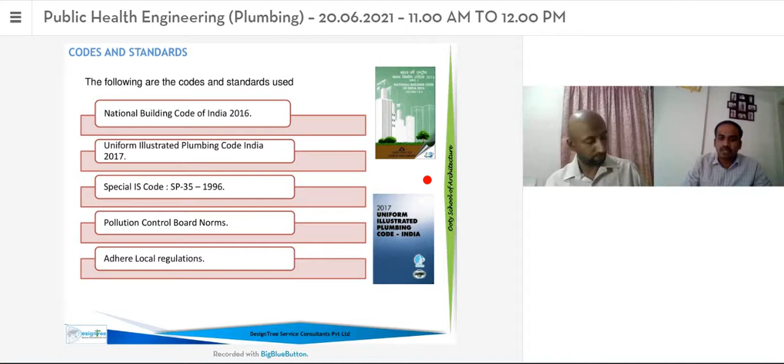We have other codes also: the Uniform Illustrated Plumbing Code of India, released in 2017, and IS codes like SP35. There are also certain guidelines which pollution control boards give, and also MOEF regulations and water supply authority regulations. There are many of these which we have to give priority to also.

Coming to the water supply system, you all know how water supply is distributed in our houses. We will be having an underground sump, and then we will be pumping that water to an overhead tank. From there we will be connecting to all the required areas like the toilets and the kitchens.

You might be thinking, why as an architect do we have to see all these things, why this presentation for us? The answer is, when you come into the profession and start detailing things out, your seniors will not have that much time to teach you everything. We have seen in the past that many architects, even with 5 or 6 years experience, fail to understand why this is required for buildings.

That is where even our company has taken an initiative, almost from the last 8 years, guiding architectural students on the basics - what are the basics, and while you are designing your concepts, what things you have to consider. That is where today's presentation comes in.

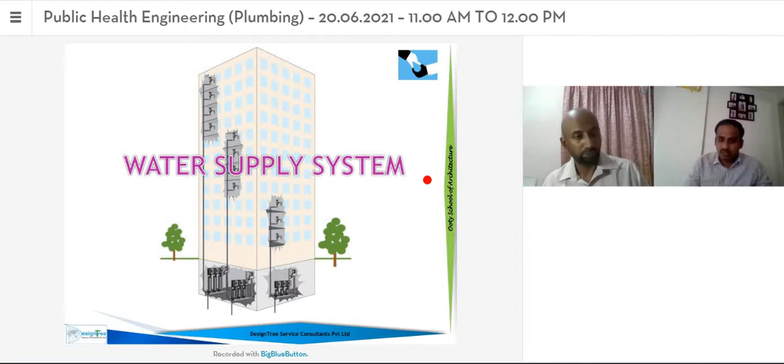Coming to water supply, what are the sources of water available for us? We know municipal supplies water, but in many locations municipal water is not available even today - even cities like Bangalore and Chennai are facing this problem. The second source is borewell water, where majorly we are drawing water from the ground. Another source is bought-out water, meaning you call a tanker, and that guy takes water from some borewell and distributes it to you.

Nowadays the trend is using rainwater - whatever rainwater falls on our terraces is collected and we have to reuse it. Many states have made it mandatory, and many end users also feel it is useful now. The last source is recycled water from the STP, the sewage treatment plant, which I will explain later.

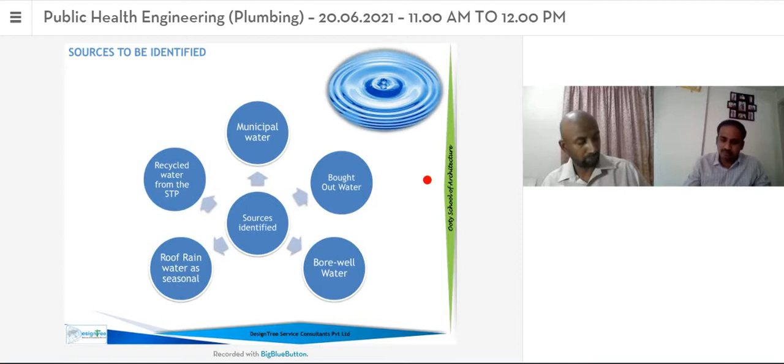You all know how the municipal water supply happens to our houses or buildings, whatever we are designing. There will be a lake or river, from there it will be taken to the pump wells, then sent to the filtration units. There will be several filtrations which will happen. After that, it will be stored in a collection tank. From there, the water will be pumped to an overhead tank or sometimes even ground level reservoirs. Those ground level reservoirs are kept at the high point of that particular area, and from there it will be fed. So from the overhead tank or ground level reservoir, the water will be distributed to our individual houses or buildings which we will be designing.

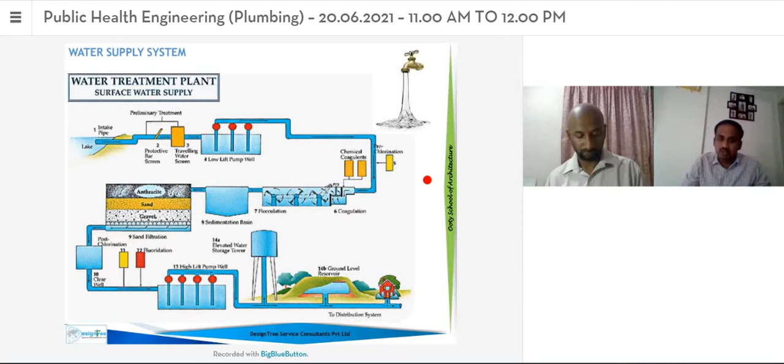So when the water comes to the building, we have to store that water. As an architect, you have to consider this storage space for underground sumps. This underground sump will be sizable because we will be designing for hundreds of the apartments or in commercial areas of huge areas. So this is one thing you have to consider.

Also, along with the UG sump, we will be having a pump room. So we have to locate a space for that. How will this UG sump and pump rooms look? So this is the slide, you can see this. Hope everybody can see the slides.

So, thank you. This UG sump and pump room arrangement, generally how it happens is, there will be a first storage tank on the left side. You can see in the slide, the fire water storage tank will be there. This is mandatory for buildings above 15 meters, and it is specified in the NBC which buildings we have to supply the fire protection system for.

So those buildings will be having firefighting tanks. After that firefighting tank, whatever pump room you are seeing, the red color pumps, that is our fire equipment, the firefighting pumps. Next to that, we will be having storage tanks. On the right side, whatever storage tank you are seeing, it's a raw water tank and the treated water tank. Next to that, whatever room is there, that is called the PHE pump room, or it's a filtration room.

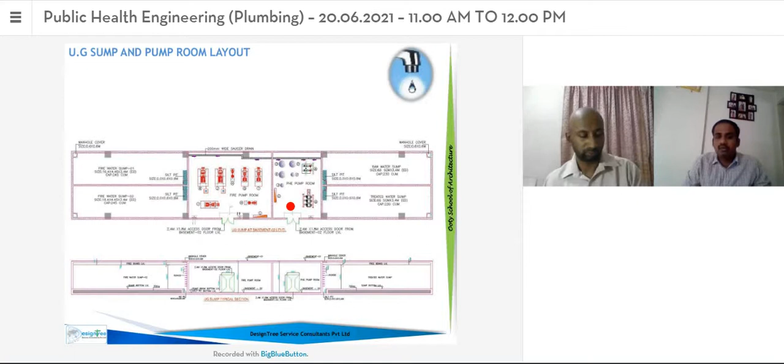So how does this work? The water, whatever the source of water I explained already, that water will come to the fire water tank. From the fire water tank, we will be taking overflow to the raw water tank. From the raw water tank, we will be sucking out that water through the pumps, and it will be filtered. If you see the small circle kind of things, these are the filters. Generally, we use sand filter, carbon filter, and the softener.

The sand filter will take out any kind of sediments in the water. The carbon filter will take out any smell or taste in the water. The softener, as the name says, will soften the water. You know that in many places the borewell water is hard water, so that will soften the water. So that finally treated water, we will store in the treated water tank. Before storing it, we will dose the chlorine with some percentage, so that if any bacteria are there, those will be taken out. After that, from here we will be pumping the water.

Okay, so we have indicated the section also for this, how the sections will be. So this is the tank and this is where the pump room is. There will be a little bit of difference we will be keeping to make sure that there is a positive suction which will be there for our pumps.

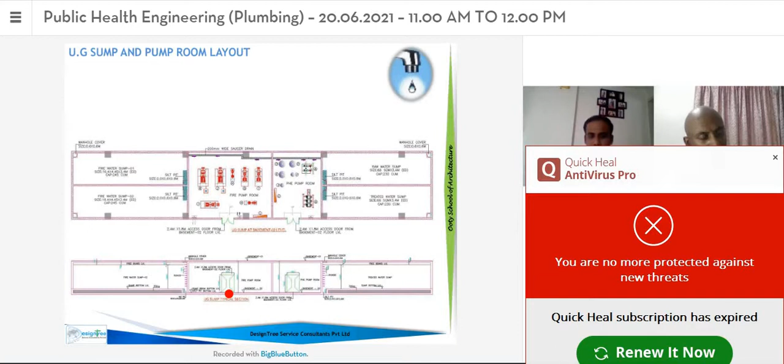Okay, how do we calculate the tank capacities?

Different buildings will be having different occupancy, and based on that occupancy, the water storage capacities will be calculated. The occupancy is also mentioned in the NBC.

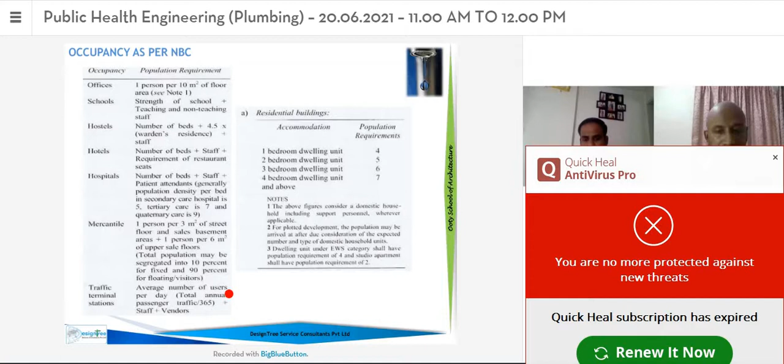We follow the NBC. Like in office areas, we will be considering 1 person per every 10 square meter. This will be changing with even a few of the clients - they will say, I need to design my building for 6 square meter per person, or somebody will say 7.5 square meter per person. But in general, if we have to follow NBC, then we have to follow 10 square meter per person.

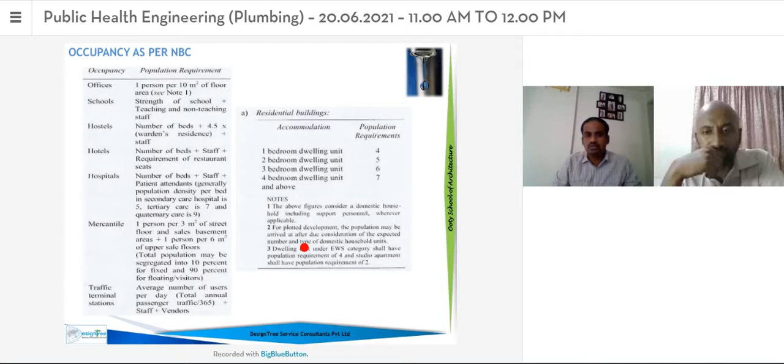The same way it is prescribed for other buildings also, and even residential also. On the right side you can see that for a 1 bedroom dwelling unit, we have to consider 4 persons, 2 bedroom 5 persons, 3 bedroom 6 persons, 4 bedroom 7 persons. This is how we will be counting the population for designing the UG sumps.

Okay, we know the population now. So what is the consumption we have to consider? What is it that per person is going to consume? The NBC says we have to give 70 to 100 liters, 100 liters per head for residential buildings. We generally consider 135 liters because that is inclusive of the STP recycled water of 45 liters for flushing. So for residential designs, we will be considering 100 to 135, whatever is mentioned here.

So we will consider 135 liters. We will be planning for some kind of high-end villas - there we can say more than 7 persons will be there in the villas, and they will be using a bathtub, rain showers, all those things. So in those conditions, we will be increasing those liters, we will go up to 200 liters per head also. That will be for specific projects.

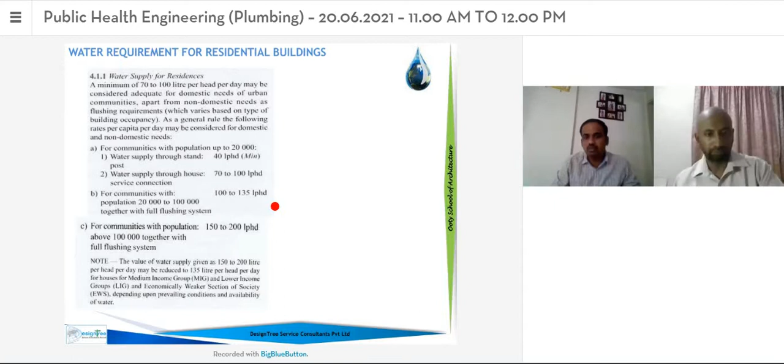So looking at those, taking the inputs from the NBC, this is how we will design. This is one of the calculations I have just projected here. This calculation is done for residential buildings. This particular project has different types of residential units - 1 bedroom, 2 bedroom, 2.5, 3, 3.5, like that. As per the NBC, we have considered the rate of occupancy 4, 5 and 6 for individual categories of beds. We also calculate number of units into number of occupancy, so we get number of persons. As I said already, we will be considering 135 liters per head.

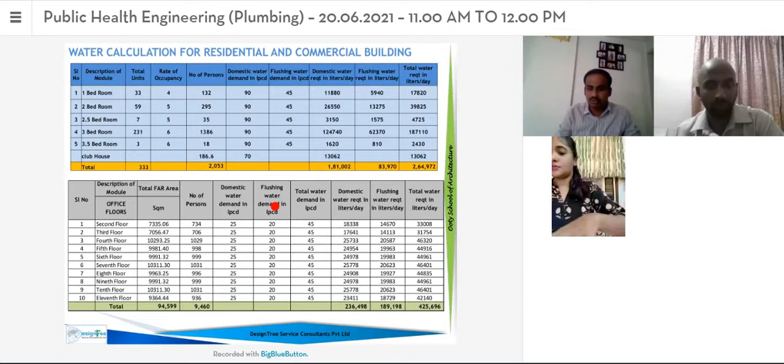Okay, from the UG tank, how are we distributing the water? In the UG sump, how many days storage do we have to consider? We can't consider storage for only a single day because there's a chance your borewell might have some problem, or you may not get municipal water, or the tanker which is supplying may have some problem and not supply. So for that reason, as a standard, we will be having a storage capacity of minimum 2 days in the project.

So in the 2 days also we will be segregating: 1.5 day storage we will be giving in the UG sump. That means if my day requirement is 100 cubic meters, I will be storing the water for 150 cubic meters. And the remaining half a day capacity, or remaining 50%, we will be storing in the overhead tanks. So if you look at this diagram, from the UG sump we will be pumping through the pumps and storing in the overhead tank.

There also we will be having a fire overhead tank. From there we will be taking it to the domestic overhead tank. I hope my colleague has already explained the fire system. Okay. So from there it will be distributed wherever it's required, whether it's kitchen, pantry, toilets, wherever the utility is required, it will be covered. So this is how the filtration units will look.

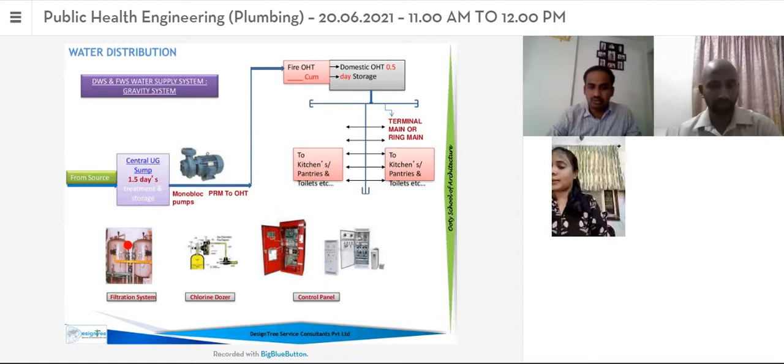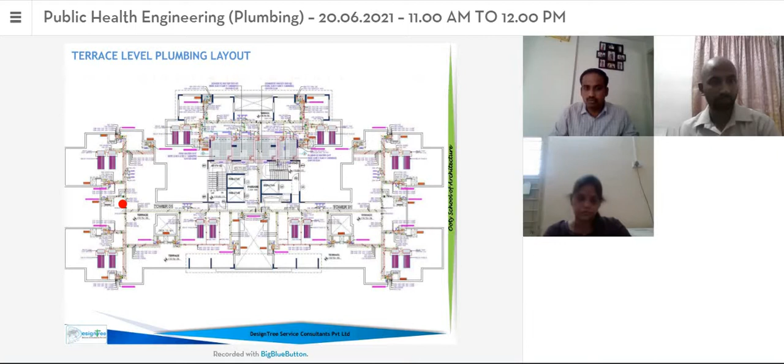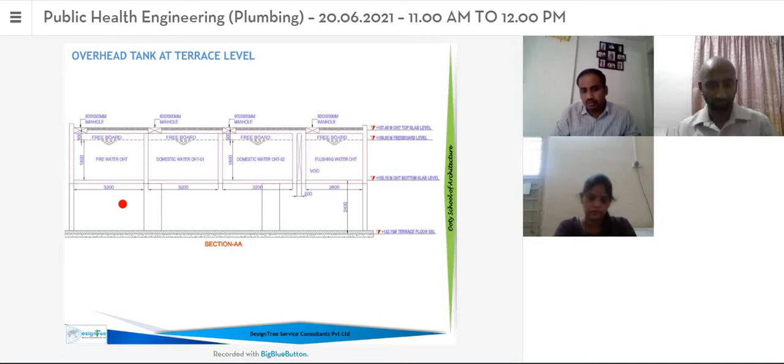Yes, we have it. Generally, if the client says the terrace should be free, and also if the buildings are very high-rise, like 50 floors or 100 floors, then we will go with a hydropneumatic system. This is the section of the overhead tank. From the terrace level, we will keep the overhead tank elevated because we have to get minimum pressure for the last floors also. Okay. So as I said, this is how it will be designed for high-rise buildings.

We generally don't go with distribution from a terrace tank, because taking the water from the terrace to the below floors with that much pressure, it will be very difficult to maintain those pressures. That is the reason for high-rise buildings there will be intermediate overhead tanks. We will be making service floors and from there we will be distributing. But these concepts are not really working out in India because we don't have 150 floors, 140 floors buildings. In South India, as per my knowledge, 50 floors is the maximum height we have till today. And in North India, we have 70, 80 floors also.

So there, how we will do the design is, we will be having a hydropneumatic system. Hydropneumatic system means it's a kind of booster system. That means I don't need to pump the water to the overhead tank and from there take it below by gravity. I will be having continuous pumping. We have to distribute in zones because we have to control the pressures. So for each particular zone, we will be having a pump set and we will be pumping out. In this case, you can avoid so many pipings and tanks at the terrace level. Okay.

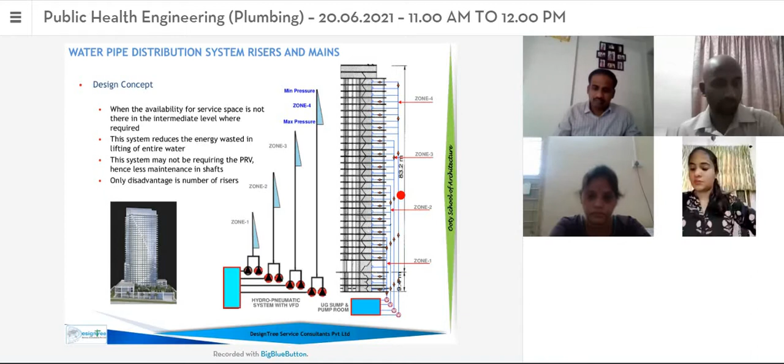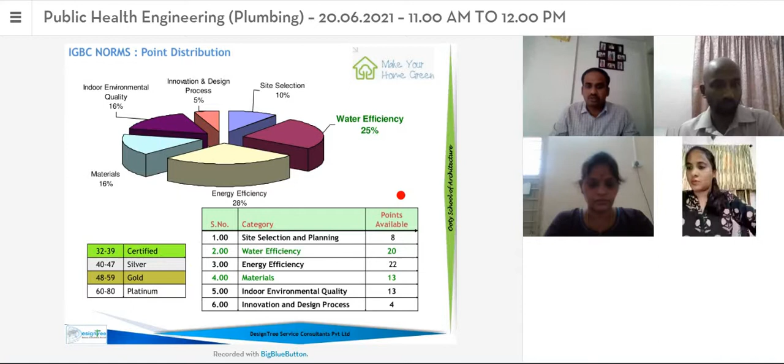For the water supply system, you all know IGBC, the Indian Green Building Council. Now for most buildings, the clients also want to go with IGBC certified buildings only. Hope you all are aware of IGBC. In IGBC they have dedicated 25% of points to water related things. Water efficiency alone is taking care of almost 25%. So you can notice how important it is. You know in all locations there are water scarcities. Okay.

So these are with respect to the water supply system. If anybody has any question, they can raise it, or you can keep it for the end also. Okay. Shall I move on to the sewage system?

Yes, sir. Yes, sir. Yeah.

When we supply water to the various units or various locations, after using it, there will be waste which will be generated. That is what we call sewage. So how is the sewage treated at the municipal level today?

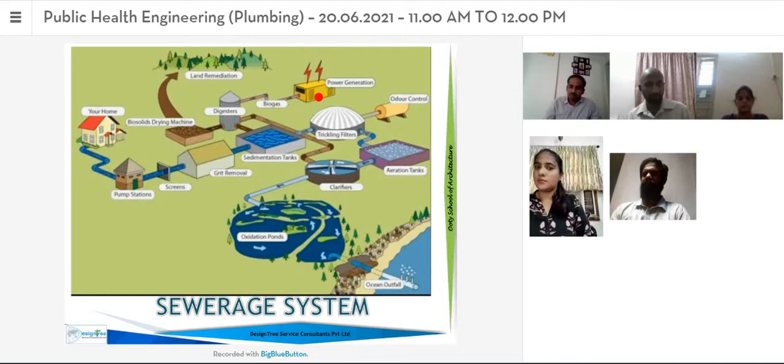This is how it is happening in many locations. We all know there are locations where untreated sewage is directly thrown into the lakes and rivers, and we are facing a problem due to that. But this is the way we have to do it. So this is at the municipal level.

Coming to our projects, how we calculate and design the sewage system: of whatever water we have supplied, we assume that 80 to 90% will come back to the treatment plant.

Before proceeding, I will tell you that there will be a sewage treatment plant, which I will explain in detail in the coming slides. That is mandatory for the buildings and projects we do. We have to have a sewage treatment plant. All the sewage will go to the sewage treatment plant for further treatment.

This sewage will carry only the waste and the soil water. Soil water is the water coming out from the EWC, commodes, or urinals. Waste water is the water coming out from the wash basin, shower, kitchens, and utilities. This is what we call waste water, also called grey water. Okay.

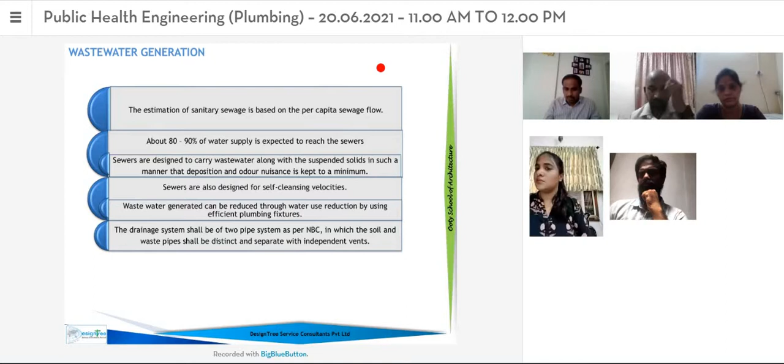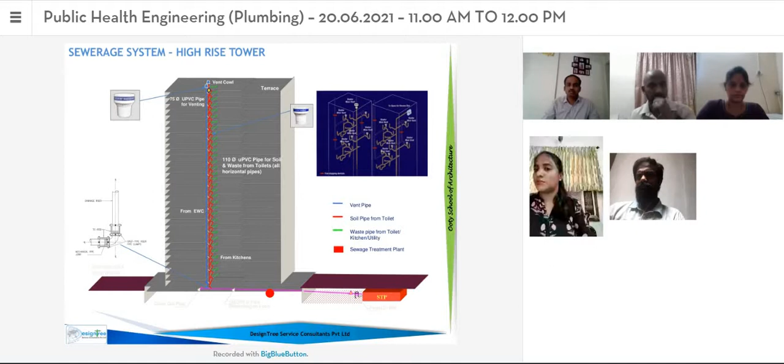So how will the sewage system work? We will be having a shaft. In the shaft, we will be collecting all the pipes. The pipes will drop down from the upper level to the basement. From the basement, we will make a header and connect it to the STP. If there is no basement, we will have a chamber system outside the building and connect it to the STP.

That means in case any maintenance is required, because these are all pipes, there will be chances of leakages. So we have to ensure we give proper space for a person to maintain it. While you are designing the concepts, please consider this. You have to give the space for that person to maintain it, not only for the pipes to be installed.

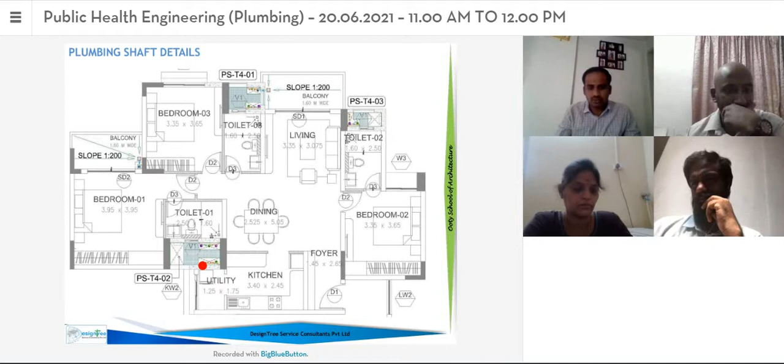Okay. As many toilets as there are, that many shafts are required. If there is a kitchen and utility, shafts are required for that also. Okay.

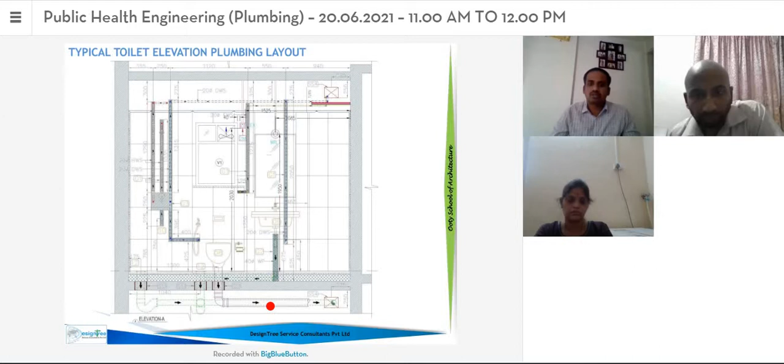But however, we will be covering that with a false ceiling, and also this is very easy to maintain. Within half an hour or 1 hour, the plumber can maintain and execute the work. So that is the reason we are not facing any problems with this system, and this is what most of our projects are doing. Okay.

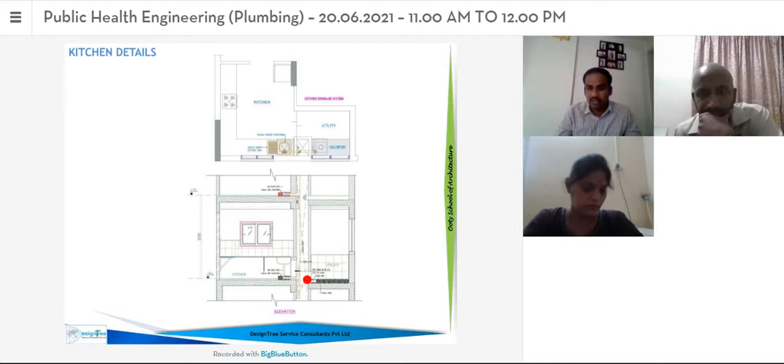The balcony, wherever the balcony is there, we have to make sure that the drainage provision is there, and we will be giving one shaft for that. Otherwise it will be like exposed piping. We see that in many of the buildings it is the same issue. You people will be designing a very good facade, everything. If you have not integrated this, there will be a pipe which will be spoiling your facades.

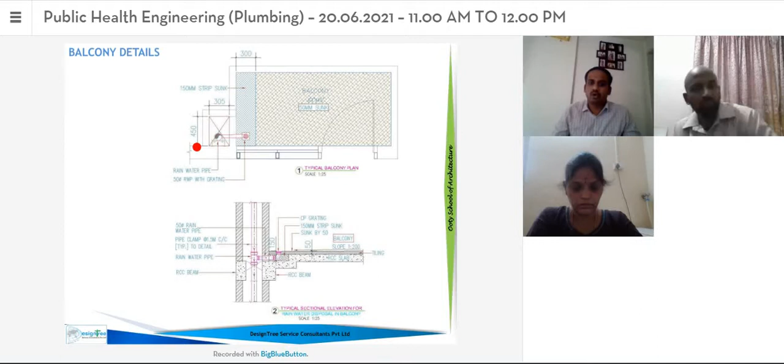Coming to the sewage treatment plant, as I said, sewage treatment plants are mandatory for the buildings. But it's not for all the buildings. You can't give sewage treatment plants everywhere. Even if it is a 10 building house, you can't have a sewage treatment plant. So there are rules. If any building has more than 50 units, then you have to have the sewage treatment plant.

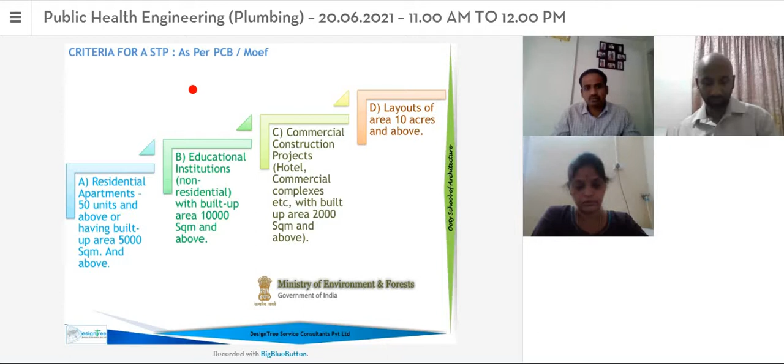Any educational institute, if the built up area is more than 10,000 square meters, you have to have a treatment plant. Commercial project, if it is more than 2,000 square meters, you have to have it. Layout development, if it is more than 10 acres, you have to have the treatment plants. Okay, it's called in-house treatment plants.

Okay, the raw sewage will come to one tank that is called the bar screen chamber. In case anything is coming out with the sewage, it will be manually removed from here, and the overflow will go to the oil and grease chamber. You know that in our daily routine we use a lot of oil and fat items, so that is going to affect the treatment. That is the reason we remove that, and from there we take it to the equalization tank, or we can call it an initial collection tank.

From this tank, the water will be pumped to the further reaction tanks. In these tanks, there will be bacteria filled up in that particular tank. When the sewage is pumped to that tank, we will be giving air also into that. We will be keeping it in aeration mode, so that the bacteria will grow, take the sewage as an intake, and give clear water.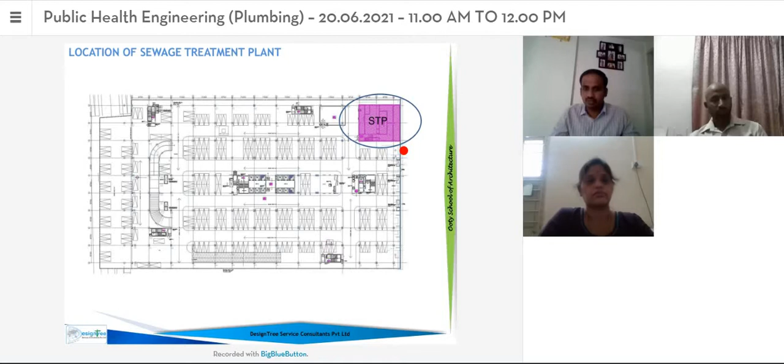So this particular STP, you have to locate in a space. In this particular project, this is the location. So you have to take care of this also while you're locating. Generally, these STPs are located in the basements, in the lowermost basements. We have to have a minimum of 2 basement heights. That means 7.5 to 8 meter height is required for this. Please take note of this.

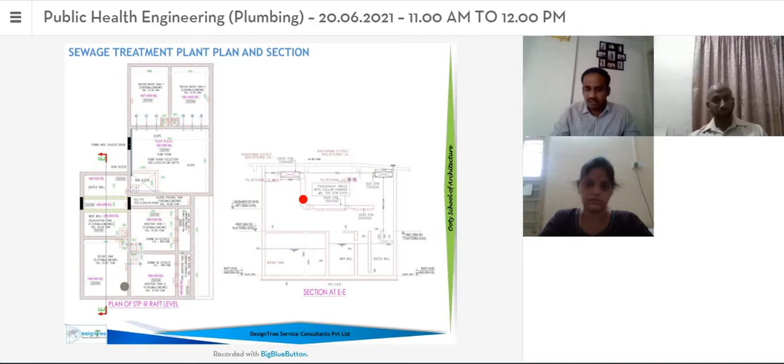This is one of the plans and sections for the STP. If you look at this plan, there are many tanks which I explained. Those are the tanks here. We will be having a pump room also, and this is how the sections will look. The tanks will be below, and above we have to have space for man movement, because 24/7 we have to operate this plant, and some person has to monitor. If some values change, there will be issues with the quality of water. And also there will be mechanical ducting to take out the foul smell generated in the STP. So these are the water parameters we have to achieve, given by the pollution control boards.

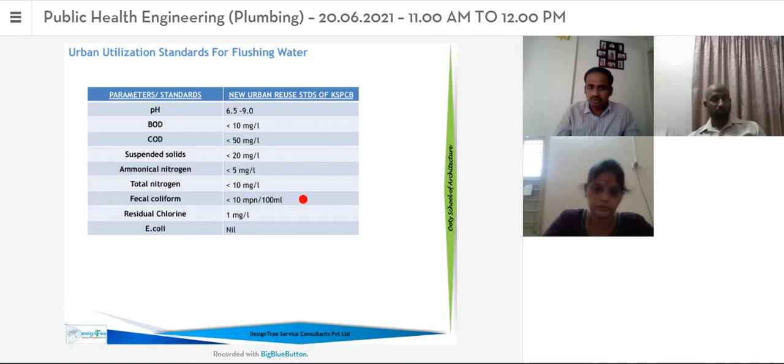So this is with respect to the sewage system. Now I will move on to stormwater management. Stormwater management means, as I said earlier, using the rainwater to the maximum extent possible for the project. It is the water which falls on our terraces, the landscape or hardscape. How to reuse that? How can we effectively use that water? That is what is called stormwater management.

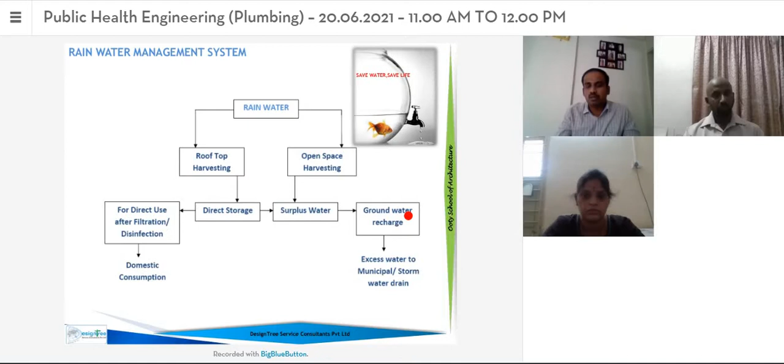So this is the flow diagram. You can see the rainwater falling on the rooftop will be harvested. That means direct storage will be there, and it will be reused for domestic application after minimum treatment. And coming to the open space, whatever water falls there, and wherever the storage is, the surplus water will overflow out. That particular water we have to recharge to the ground, so that the groundwater table will be increased. So you have to integrate that tank also.

We have to have a storage tank for the required capacities. Like in Bangalore, we have the BBMP. They have given a guideline saying that for every square meter you have to consider 60 liters, and you have to size the storage tank according to that. Okay.

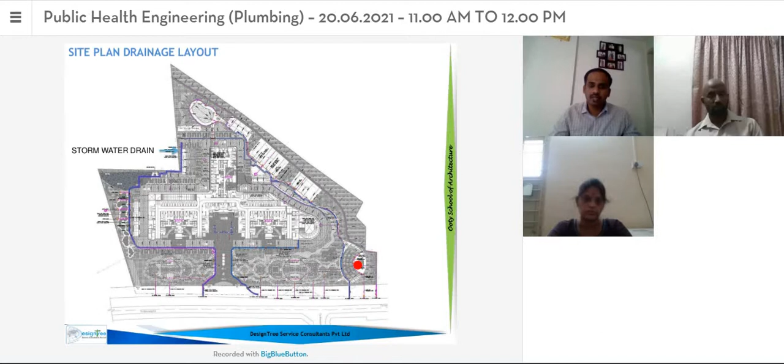So this is the drainage for one of the site plans. As I said, the water falling on our surfaces, we have to channelize it. We can't leave that water there, it will create problems. So we have to channelize it to the discharge point. Before discharging it, we have to recharge as much as possible. So you have to allocate some spaces for these recharge pits, and you have to plan the gradient to slope the water naturally. Okay.

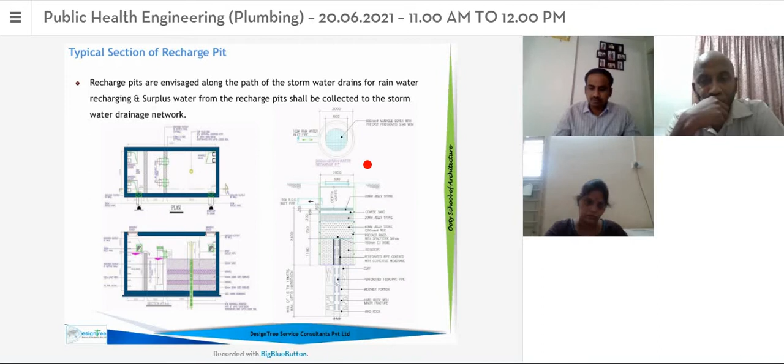These soak pits are rings with a diameter of 3 feet, 4 feet, 5 feet. You will get them in different sizes. The rings will be made into a 3 meter or 4 meter deep well, and the water will be left there to percolate. The percolation will increase the groundwater table. Whenever there is maximum rain, definitely there should be an overflow, and that overflow we can give to the municipal drain. That is with respect to rainwater harvesting.

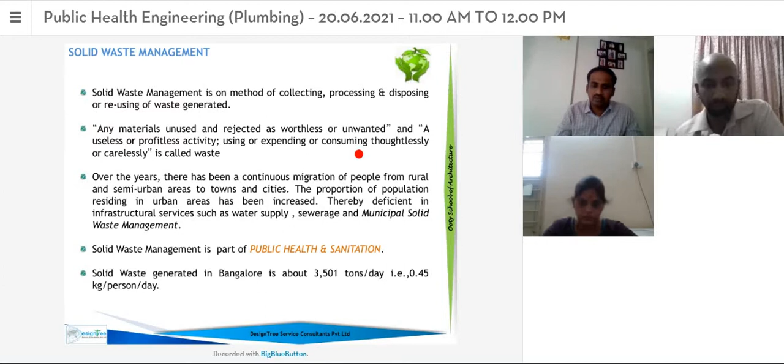Coming to solid waste management. Solid waste management means the waste which is generated in the buildings; that also we can't give to the municipality to take care of. That is also one of the norms. We have to reuse it within our building. How can we do that? You all know that whatever waste is generated, it will be organic or inorganic waste. So how will it happen?

There is the option of collection. How will the collection be done? In many apartments, house to house collection will be done, or we will have centralized locations where people will come and dump it. And now it is mandatory in many states that you have to separate this waste at the source itself. That means the wet waste you have to...

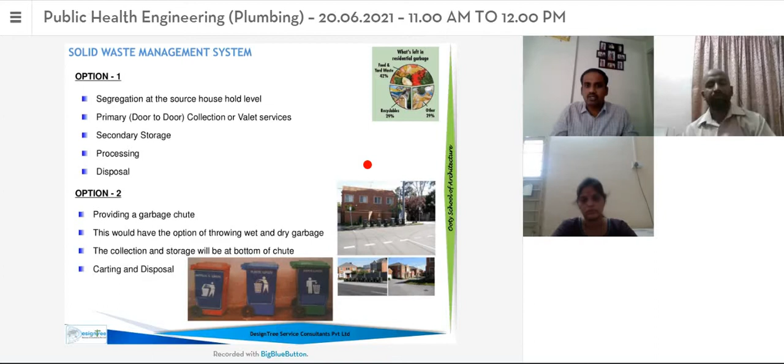Hello. Okay. Yes, sir. Yeah, go ahead. So you can continue, sir. Okay, continue. Thank you.

So the wet waste you have to keep separately, and the dry waste you have to keep separately. There is one more option also: providing a garbage chute. If it is a multi-floor building, like 20 or 30 floors, taking out the waste itself becomes cumbersome. That is the reason companies have introduced chutes.

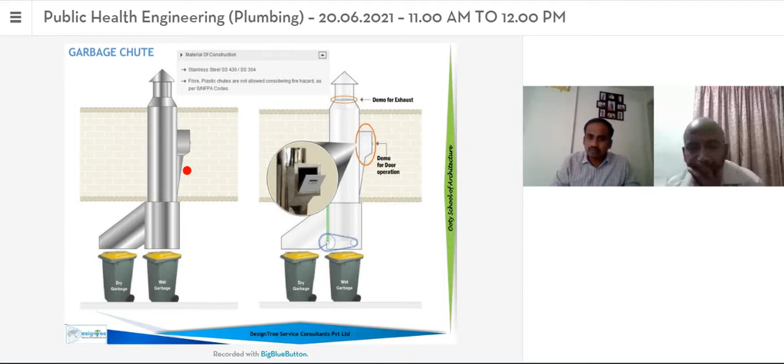It's called a garbage chute. You can see here, these garbage chutes will be installed in buildings so that you can throw the waste from here. It will be collected below and taken out to wherever it will be recycled. Okay. If you look at this, this is one of the shafts made for a garbage chute. From here, the public or the apartment holder will come and throw the waste. Okay.

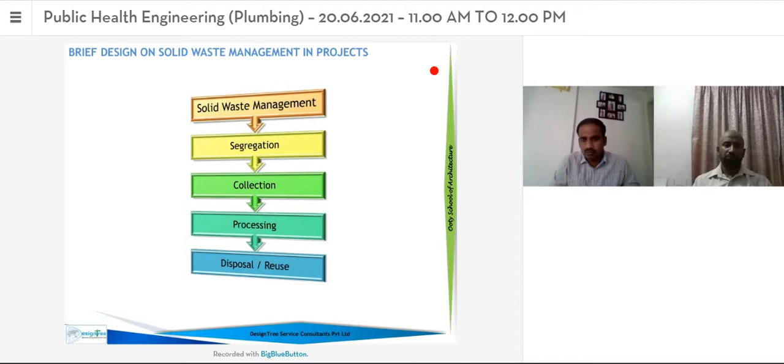What are the systems involved? First is segregation. As I said, it now has to be done at the source level only. The collection I have already explained. Next is processing and disposal. So how do we process this? What are the ways you can process it?

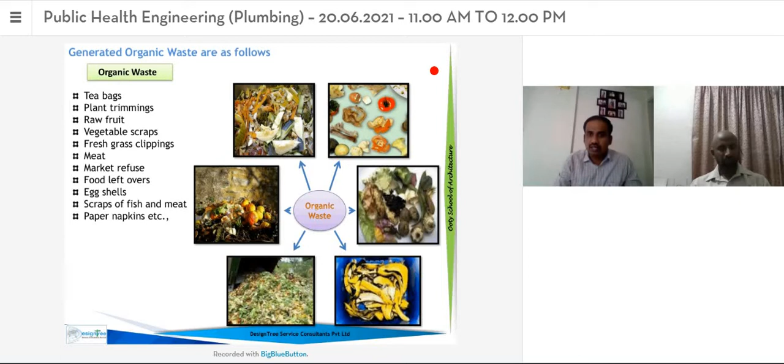The waste we can process is organic waste. What is that organic waste? It's called wet waste, which includes tea bags, plant trimmings, raw fruit and vegetable scraps—all those things we call wet waste. This we can recycle within our buildings.

Inorganic waste means which we can't recycle within the premises—that is cans, drink cans, glasses, plastics, all called inorganic waste. There is also e-waste and biomedical waste. E-waste means computers, laptops, and related items, and biomedical waste is what is majorly generated in hospitals. So that is called biomedical waste.

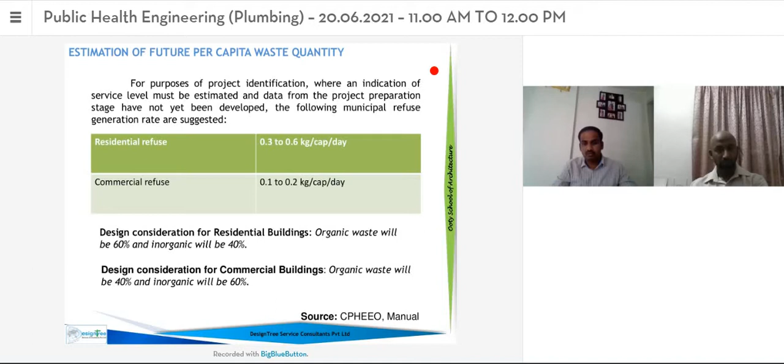All this has to be stored separately and treated separately. So how to calculate this waste? For that, the NBC and CPHEO manual says for residential you can consider 0.3 to 0.6 kg per capita per day as total waste, and for commercial you can consider 0.1 to 0.2 kg per capita per day. Of that, 60% can be taken as organic and 40% as inorganic.

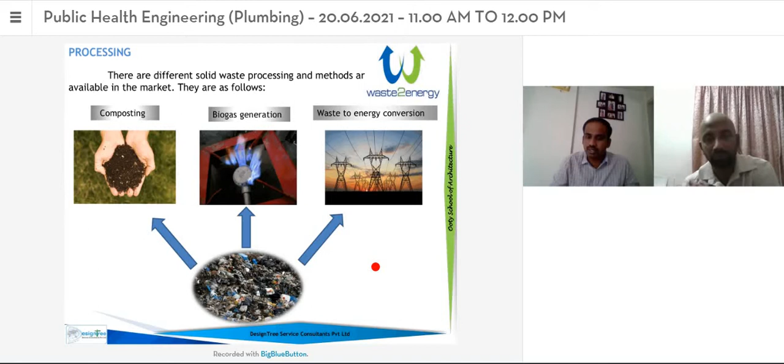What are the things you can make from this organic waste? As I said, you have to process that within your building. By processing, what can you do? You can process this into compost. You can also use this for biogas. If there is a huge volume, this waste can also be converted to energy. So these are the outputs we get from the waste.

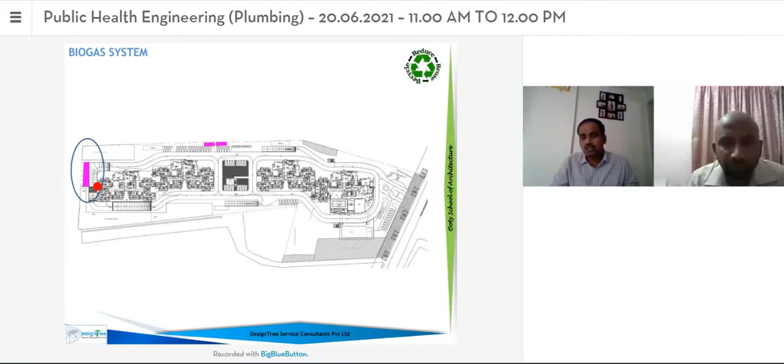This is the location of the project when you are designing it. This particular biogas unit and the OWC, organic waste converter, we generally suggest keeping at the site level instead of in the basement.

Coming next is the LPG system. This is not exactly mandatory, but it's a necessity for high-rise buildings—you can't keep taking cylinders for individual houses, as there will be damages in the lift and staircases. That's the reason for piping gas. It also has some mandatory rules: you can't store more than 320 kgs of gas within the building. If it is more than 320 kg, you have to store it outside the building, and from there make the piping.

If the storage capacity is more than 1000 kgs, then you also have to have a safety distance of 3 meters between the two gas banks.

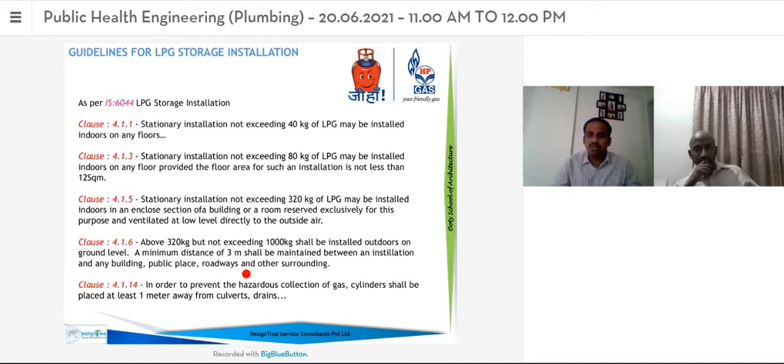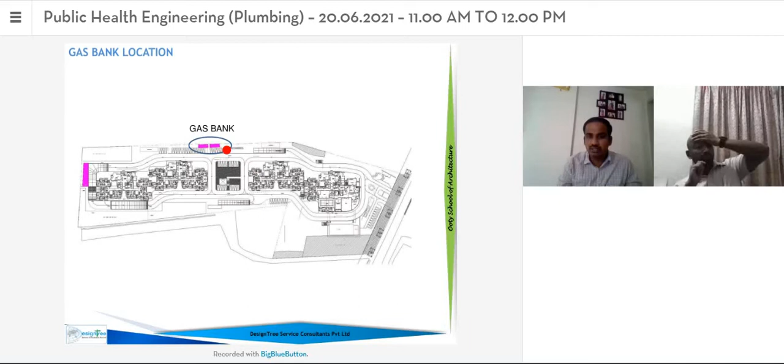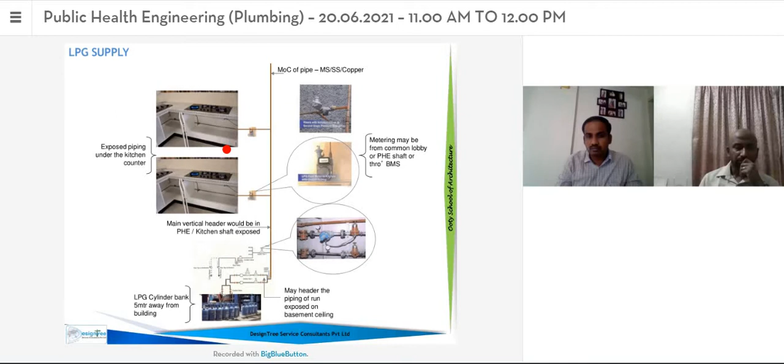This is the location of the gas bank for one of the projects we worked on. As you can see, these things have to be kept outside the buildings. This is the schematic diagram of the gas bank showing how it will look, and this is the piping diagram showing how it will go and give connections.

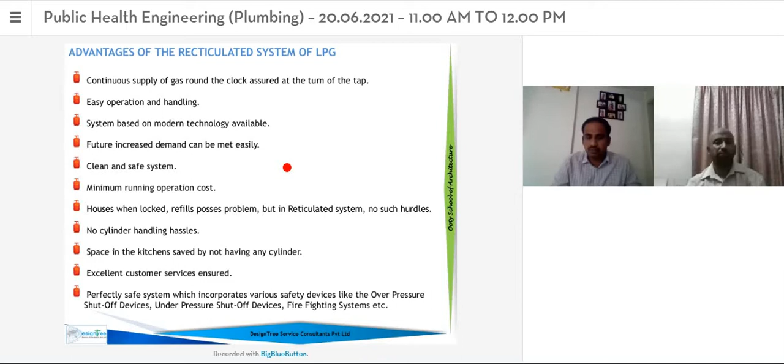Nowadays there is also pipeline gas available. In that case, you just take out the cylinders and can directly give connections from the pipeline.

The last topic I am coming to is HSD. HSD means high speed diesel. Why do you need high speed diesel in projects?

When designing commercial buildings, you will have DG sets, because commercial buildings, data centers, or factories can't sit idle if power is not there. So you will have a backup diesel generator. Whenever the diesel generators are running, you can't just go on bringing diesel from nearby bunks. So the government has permitted having your own diesel yard within your building. That is what HSD is.

So when you are planning majorly for commercial buildings, you have to consider this HSD also. So how will it look? This is how it will look.

There will be a loading platform, and there will be a tank submerged in the ground. If you see that HSD, the entire area has to be fenced. Even though this is submerged, the entire area has to be fenced because this is a hazardous thing. Also, when planning it, you have to make sure that this HSD yard and the gas banks are kept a minimum of 15 meters away from the electrical installations.

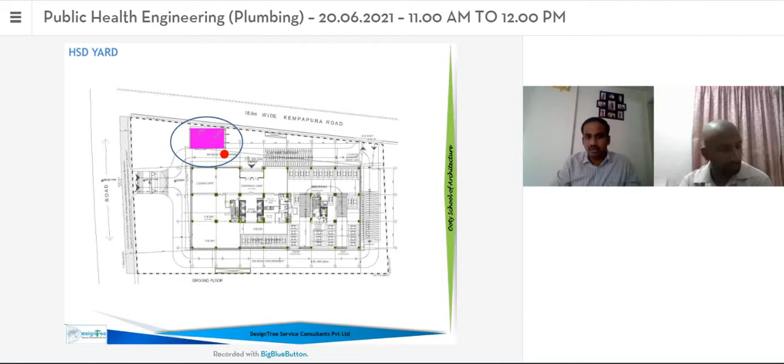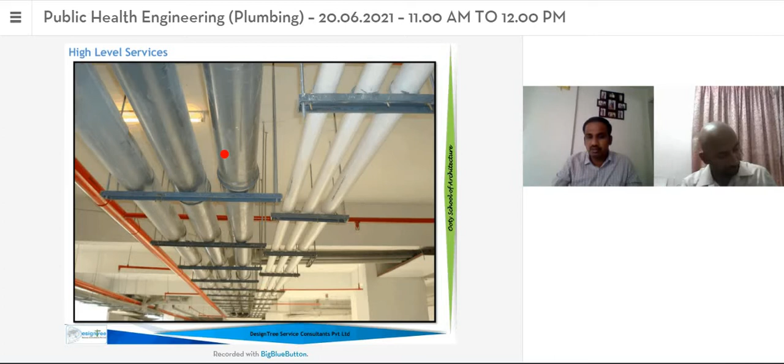A few of the plumbing installation photos. This is how it will look in the shaft, in the basement ceiling, the pipes. This is how it will look in the terrace. This is the terrace, and this is in the basement.

There are a few innovations in plumbing. Many exist with respect to the technical parts, so I have taken only a few to show you. This one is called pod toilets, or ready-made toilets. If you have more numbers, typical toilets are there.

Then you can go with these options where factory fabricated toilets will be there. You can just take that and install it, so that many of the works will be avoided.

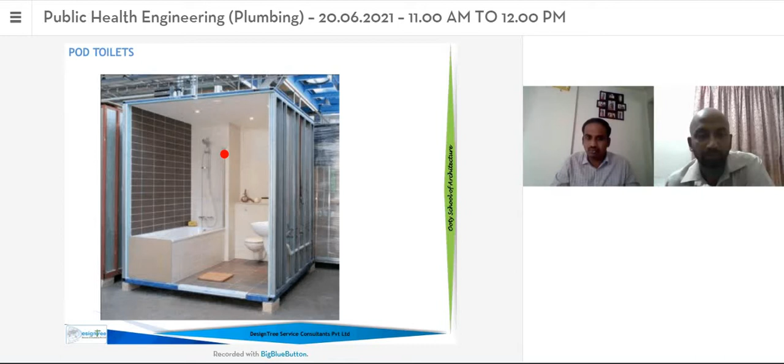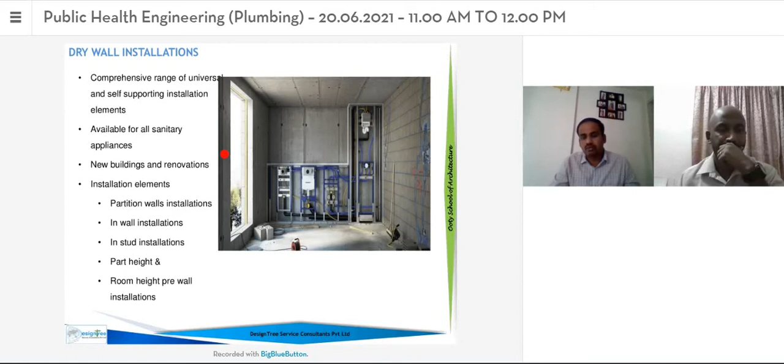And also the drywall installations which are available. That means if you are making renovations in projects, you don't have permission to cut open walls, because many buildings now go with aluminum formwork, meaning RCC walls only, so they don't give permission to cut those things. So in those projects, you can go with drywall installations also.

And nowadays we have these fabricated chambers. You can see in your areas also, if the government has to build one chamber, they will take a minimum of 1 to 1.5 months because of the work involved. Now these kinds of PE manholes can be completed within 2 to 3 days.

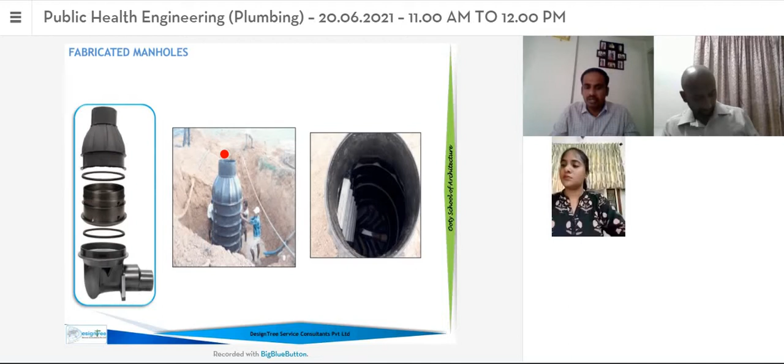By this I am ending my presentation.

One more thing I want to add on: the central monitoring system. This lets you control and monitor each and everything, like the level of the overhead tank, the level of the huge underground tank, the water levels. You can even give individual meters and monitor that also in this. This is also one of the things picking up in the market nowadays.

Okay, thank you, by this I am closing my presentation. It's exactly 12 o'clock, so if any questions are there, it's welcome.

Thank you, sir, for an elaborate explanation on public health service, focusing on water requirement calculation, terrace level systems for water supply for mid-rise and high-rise buildings, which was in par with what our third years are working on. Using site drawings to further explain the plumbing details, sewerage treatment plants, focusing on stormwater drainage for the overall site, and also getting into the details of solid waste management, biogas plant, LPG, high-speed diesel, plumbing installation, and the innovations in the industry, especially integrating it with architecture. It was a full circle, sir.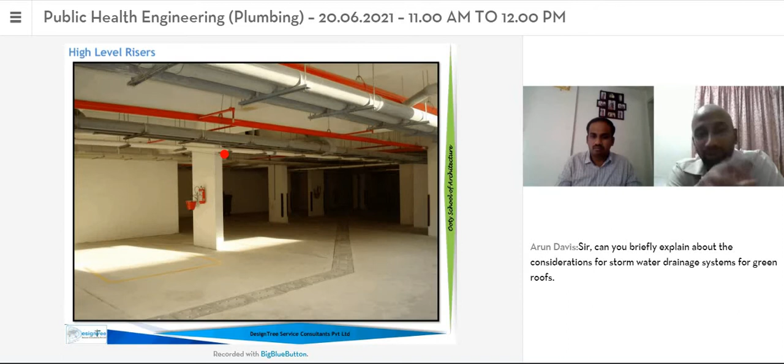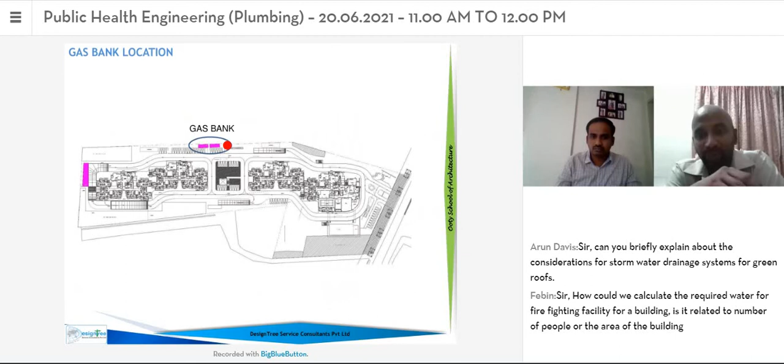Sir, I had a question regarding the solid waste management system you were talking about. You mentioned a standard garbage chute, mostly set up in apartments, but the key is that waste has to be segregated into dry and wet at the residence level itself. I live in an apartment with a very simple single garbage chute, where you just put your waste in a bag and send it across. We practically were not segregating our waste, everything was put into a single cover.

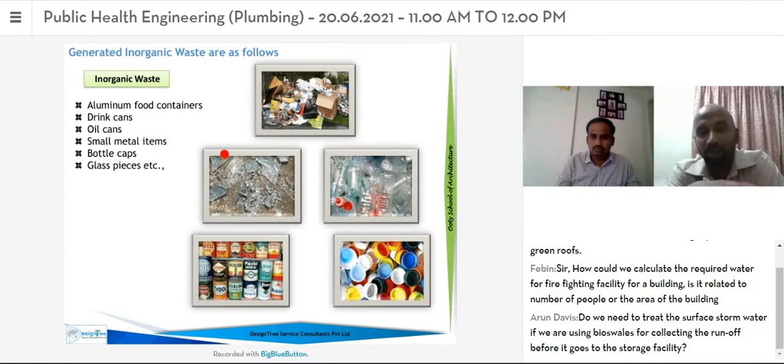The only instruction we were given is don't put it directly from the waste bin into the garbage chute, because there was a chamber at the bottom. There used to be people who would collect it from there, a big door at the bottom that they open to take out the waste. So I was curious, because you mentioned a garbage chute system with a two-way channel, one for dry garbage and one for wet garbage.

Yeah, I will answer. Earlier, whatever you are saying, that was the technology being used. When there was a problem, the main issue that happened in many cities regarding garbage, then they made changes.

Sir, can you mute? I am getting my voice. Oh yes, sorry, really sorry.

When all these problems happened at the municipal level, they made it mandatory, saying okay, I'm not collecting your waste, you have to reuse it within your premises. Earlier also it was there, but it was not taken that seriously. So when those kinds of rules were introduced, there was no other option, we have to segregate. So even garbage chute manufacturers, who had only one single chute, now it is changed.

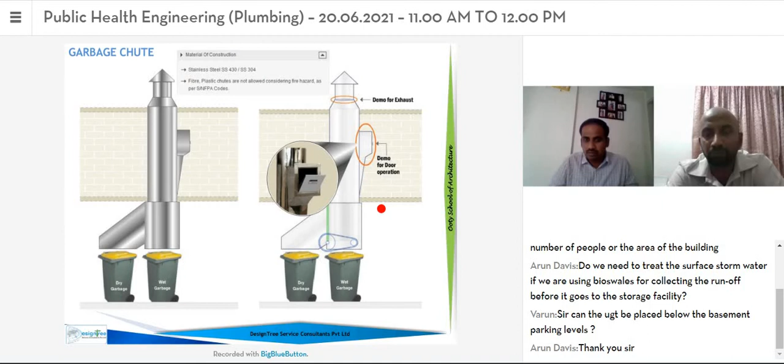That is the reason even the clients came to know after these flooding issues that this is really problematic. So now in most of the projects we are planning the UG sump and the pump room at the basement 1 level, I can say the uppermost basement level.

Sir, good morning, sir. Yeah, this is Prabhu. Sir, I have 2 questions, sir.

The first question: is there a minimum pipe slope ratio from the bottom of the building till the STP?

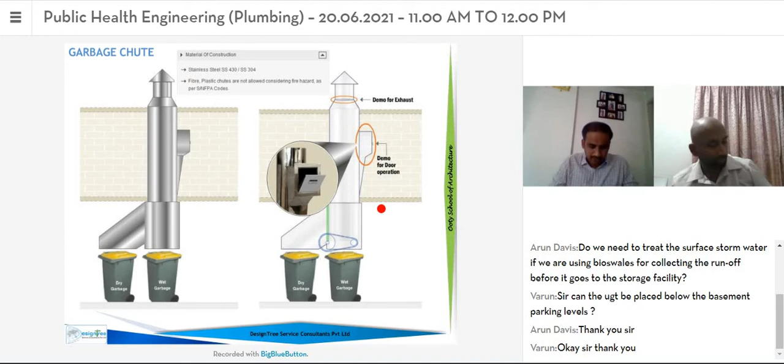Waste pipeline to determine the depth of the STP? Yeah, it is there. See, the slope ratio will vary for different types of pipes. That means if I have a plastic pipe, the smooth surface will be there and the slope ratio required is less. And also it depends on how much flow is there, and also it depends on how much diameter you

are giving it. Okay. So generally in the projects we use 160 to 200 dia pipes, and we follow the slope from 1:150 to 1:200. So this is what we follow. Yes, it has its own calculation. Yes, sir. Thank you, sir.

Sir, second question is, while designing hospitals and medical facilities, we provide a lot of medical garbage chutes. In case they are planned in a horizontal manner, and we have a lot of different chutes, is it possible for us to supply one particular vacuum suction and take it from different pipelines?

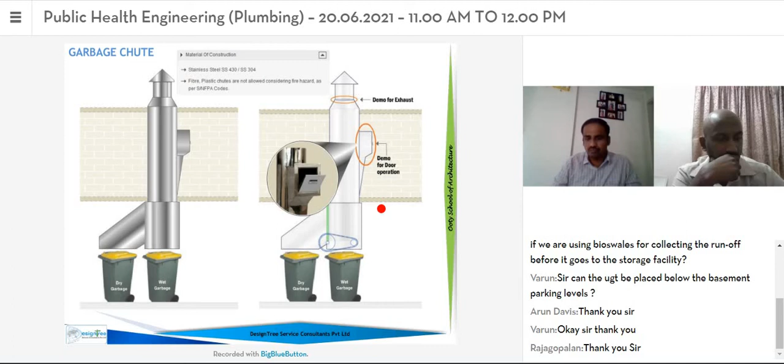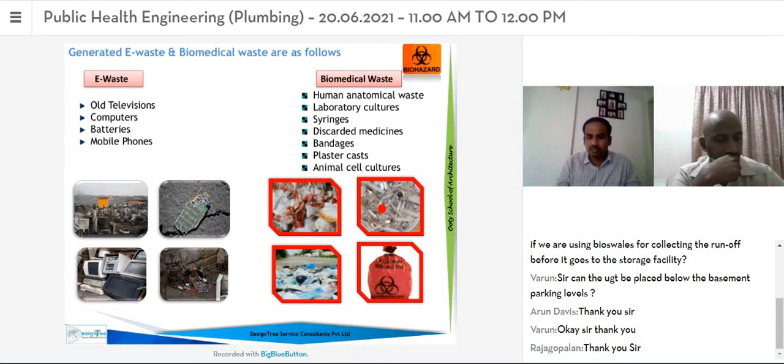Yes, it is possible, but it's a very, very costly thing right now. Okay, as I already showed you, that vacuum waste collection system has this kind of potential to take it out even from the building level also. Okay, but it calls for a very big cost. Okay, sir.

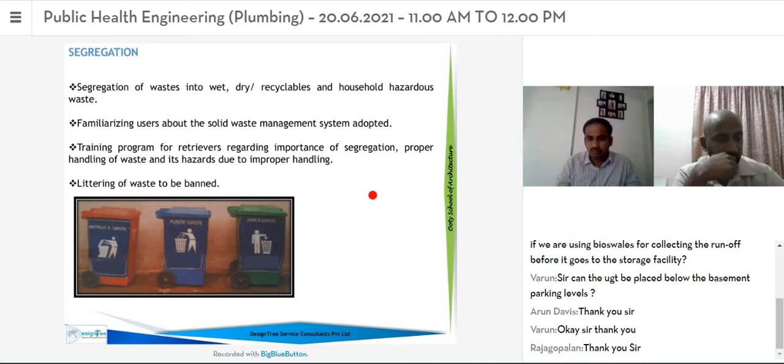Any other questions in the chat box? I'm not seeing any questions. Students, any other questions? Yeah, sorry, sir. I just had a concern.

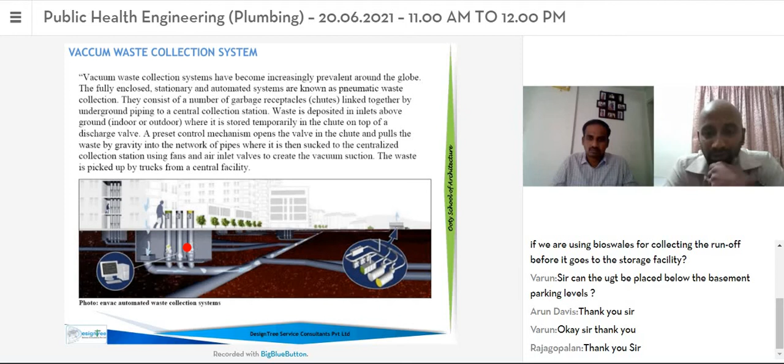So you're talking about the treatment of water in a large project. I just want to know, in India, are we moving towards constructed wetlands as part of large sites? In case we have large sites like townships, are we going for constructed wetlands as one of the initiatives? Is that being explored right now in India? You are directly from the field, you can tell us.

Sir, there are some projects we have seen, especially institutes and a few government buildings where they have huge land and very small buildings. There we have seen these wetlands. But when you come to the private segment of projects, it's not happening, because they are using even every inch of land.

And these wetlands require huge space, because it's a natural process. You are not pumping any chemicals or anything. You are putting in some plants which will take out the solids and give clear water. So yes, it is happening in a few government projects and a few institute projects, sir, not in the private segment.

Thank you for that. Thank you. Good afternoon, sir. This is Lakshmi Priya. Sir, I have one small question.

Maybe you can give a small brief about desalination plants and how we can use them in huge community projects. Most developed countries are taking up desalination plants as a mandatory system in overall community living. In India it's not even mandatory, but as a climate-independent water source, they may be jumping into desalination plants very soon. So can you give us a small brief? How can we use it? How can we place desalination plants on our site, for our students?